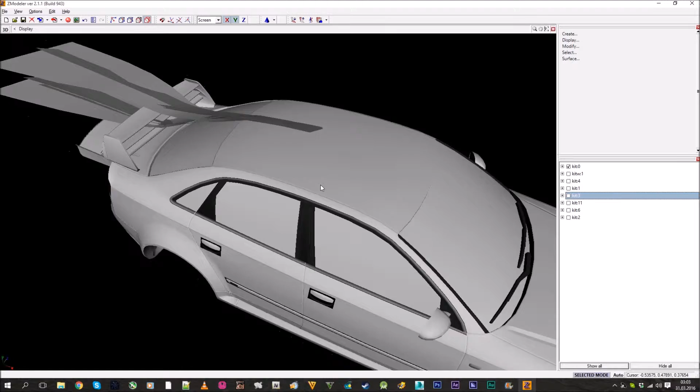So when you import, you have this kind of model. It has this wind effect which is in the game, and here is the tuning kits. If you decide to make a tunable car, just keep them in this file as well - here's all the kits which this car has. I will make it stock so I don't bother with this, I'll just clear it, easily delete them, and it autosaves.

Remember to enable autosave. You can do it in the settings so you don't lose your progress.

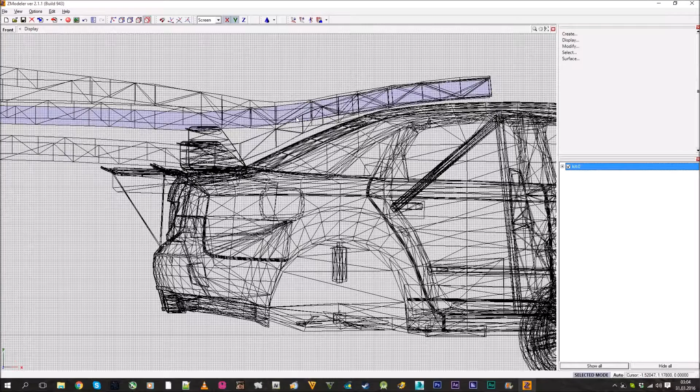Once we have deleted that, we can also delete all these unneeded objects which we don't need, like these wind tunnel effects. Just draw with the mouse, go on them and press delete, and it will go away. Delete all the spoilers, we don't need them, and this one. So right now we have left the bare model, with the cage and driver - we don't need the driver, so just delete it.

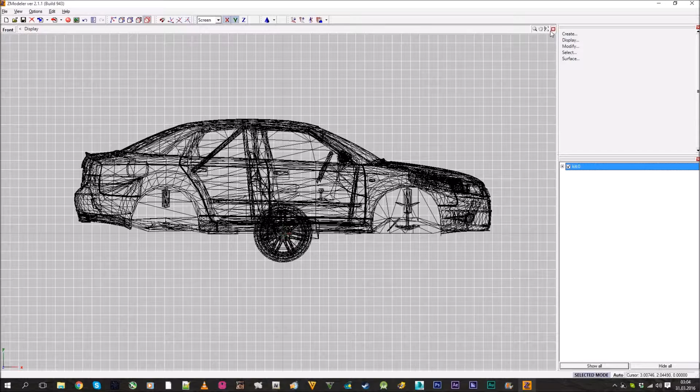So now when we go into 3D view, we have just the car with the seats in the middle and wheel in the middle.

In this there are a lot of objects. If you make for GTA 4 or 5, you can keep these A, B, C and D versions - it's just like a resolution. This is high, I'll show this rear bumper - this is high, this medium, and this low and lowest model bumper.

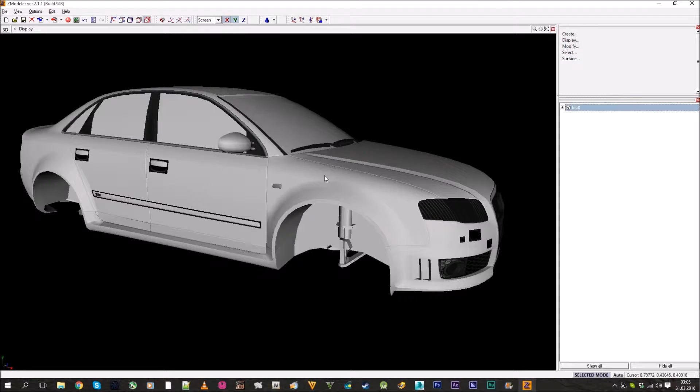So let's go step by step through what I usually do and how I approach making cars for GTA San Andreas. What I usually do first when I import cars from Need for Speed, I go to the Materials Editor.

Find some texture which is already showing, or just press on any, and here's Materials. When you import, you'll import textures as well. Here you'll have a list of all textures used for this model. So before you do anything else, click here and save all textures to your folder where you plan to save the file. I already have them exported, but just click one by one and save them. Because if I closed my Zmodeler and opened it again, they would be gone - I couldn't touch them anymore and would have to import the model again.

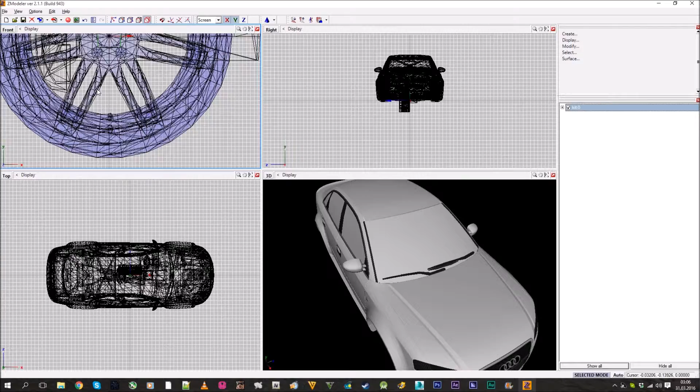So let's continue - as you saw, we have these wheels. We don't need these brake rotors as we will make our own. Here are the brake calipers, we can easily delete. And now in Need for Speed, especially ProStreet, here's the left seat - we can already delete the seats as we won't need them. Seats, engine, seat. What I want to say is, in Need for Speed, the A at the end means the highest level - for example here, rear tire A, it's like the most high-poly model.

So let's start by texturing them, as you already know if you saw my previous episode. Here are all the textures - right now they don't look like anything, and here's usually how I discover which one is which. For example, this one you already know, so you can just name it badge, so later on you know it's a badge. You go one by one looking for textures which already have a texture and which one you recognize.

You can just rename them to names you remember. For example, here I can just rename to Dream and so on. That will do one by one.

How I usually do is click on a random color and just look where it is. So I know this is the door line, so I write in here door lines. Click next, again some random color. Oh, and this is the main body, and we need this especially. And here I just write body. And just continue one by one, and here's misc.

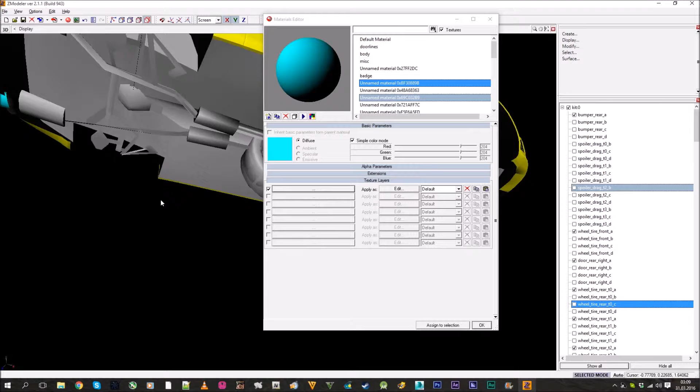I will show later on what I mean. And then badge, and again just look for the random color and see what it's used for. So I know this is for the chrome, so again just write chrome. And this one, again unknown texture, just pick a color.

If you don't see it at all, you can either delete it or leave it. It doesn't matter, but it's better if you delete them so they don't bother you later on. As I don't see this texture, right now it shows everything which you'll see in the game, and there are no hidden objects. You can just fly through them and see there is no orange object, so most likely it's carbon or something, just press delete.

Now this unknown material, you can press orange and just search for the right color. So again, no orange, but just for the sake of doing this faster, I will just quick select all random colors and check which is which.

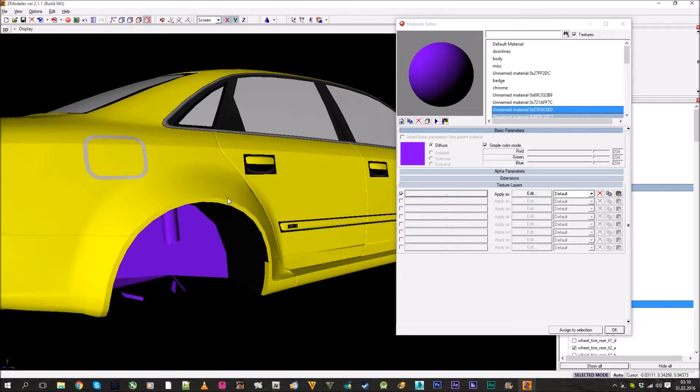And here is this underneath texture which is not in this menu when you import. To get it, you either need to open another common texture file from ProStreet. I already have it exported, so I'll just add it to my list. RS4, and here is the RS4 underbody, and just press OK. And now it's textured.

So I will just write it as under, so I know it's under. Next one, pick any random color. You can just leave it. Next one, and keep them as random as possible.

And one more time, and just keep doing this until you have found out the textures. So I will be back when I have assigned all textures.

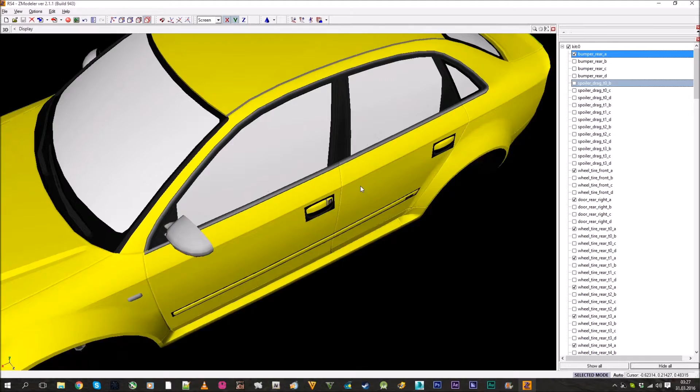Okay, so the first part I will do is get all the, as you can see here, I have many glass textures, well, 6 pieces and there's 6 glass. I don't need all 6 textures, so I'll just assign them all to one texture.

To do that, here's all the objects you will need. So just go to polygon level, click select none. I usually select none, as you know. Then select separated and click on one of the glass pieces. Let's use this glass and assign selection. I select none and back.

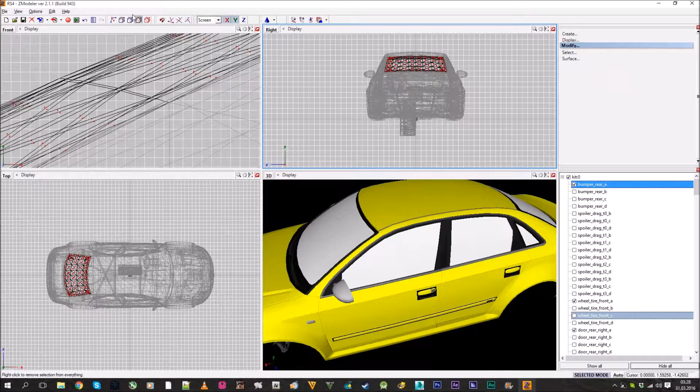And do that to the rest of the glass. Clear, select none, select separated. As you can see, there's a double layer. The second layer is used for the damage inside the Need for Speed game, but I won't need it, so I just assign both layers to the same texture.

So now go to the side view, user view. Let's go to user view because it's easier, and let's disable the main body. Let's find the body.

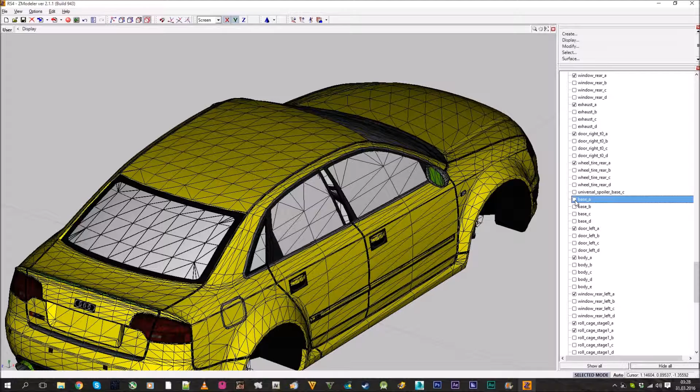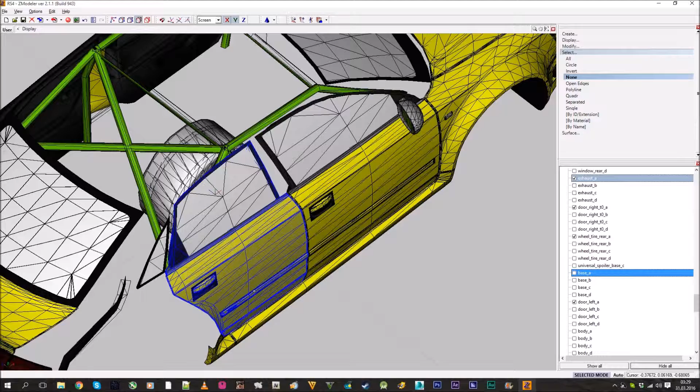Go back to that one glass. We pick the first one and assign selection. None to object, to polygon mode, not to the door, the glass. Select none. Be sure you are in the polygon level, because as you can see here, use this small piece and also here, that's why I go into polygon level to select only glass pieces. Select OK, now select none.

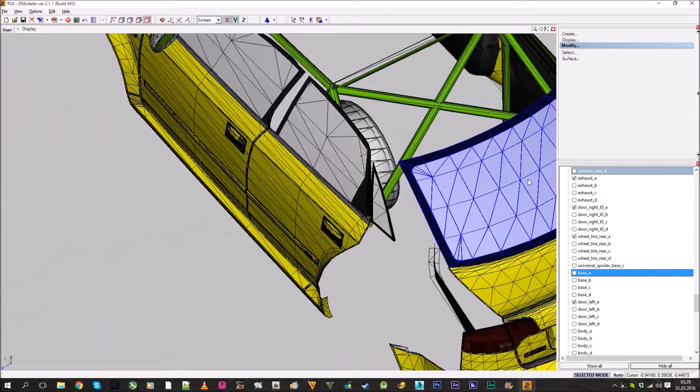Go to the rest of the glass. Let's delete this body roll cage, we don't need this because I won't make it like a race car or anything. I'll just make it a stock RS4, which already is not stock. Did I select that small piece?

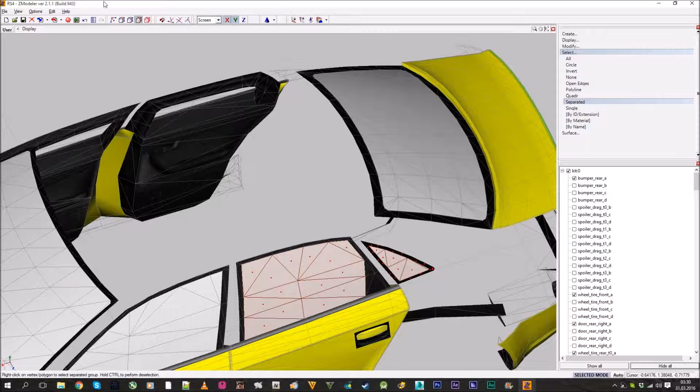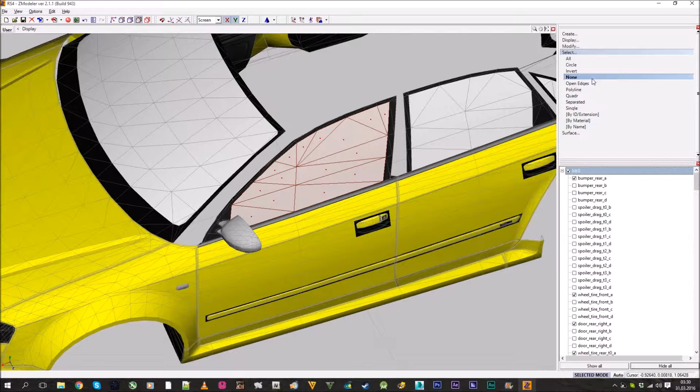I forgot, just find that glass, assign selection, OK, select none. Now go to driver's window, select none, separated, and glass. Be sure you assign them all the same texture, select OK, and none. Now go back to the 3D view and we'll check that glass texture. Glass, is this the right one?

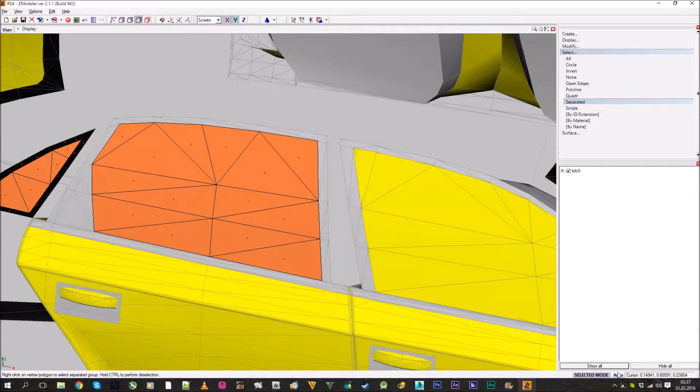Alright, I'm back and just figured out what I had to do. Turns out I needed to delete the first texture layer, so it's applied. Just select separated, enable auto, select mode, and press delete button, and it deletes the first layer. As I said, in Need for Speed they use 2 layers, though I never had this issue before. So we delete the first layer from all glass pieces.

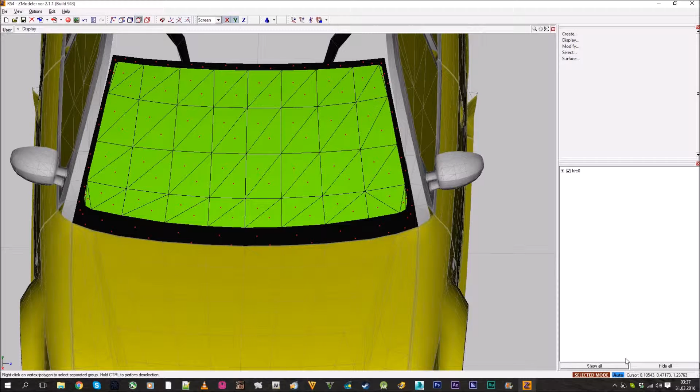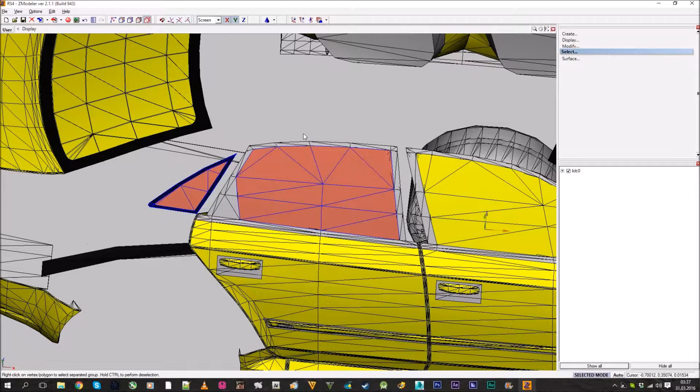And now we can assign. As you can see, I have lost all the textures because I closed the file and didn't save it properly. And now, yeah, now it works as it needs to be. Well, at least now you know if something goes wrong for you.

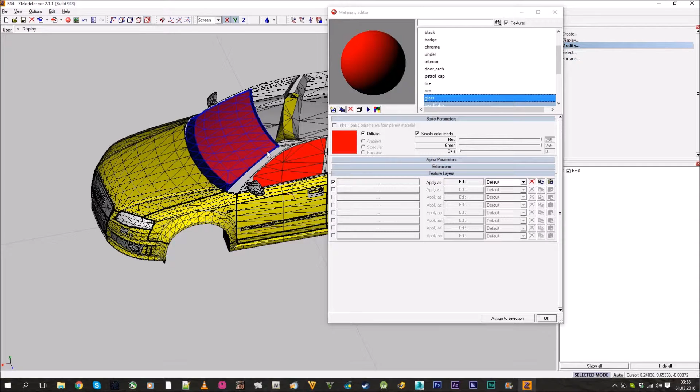And press glass, glass, and assign selection, OK, press none. So now I have all the glasses. This should be all the glasses now. Yeah, no, you can turn back your body that I want. Well, yeah, I can actually turn back the body. That's fine.

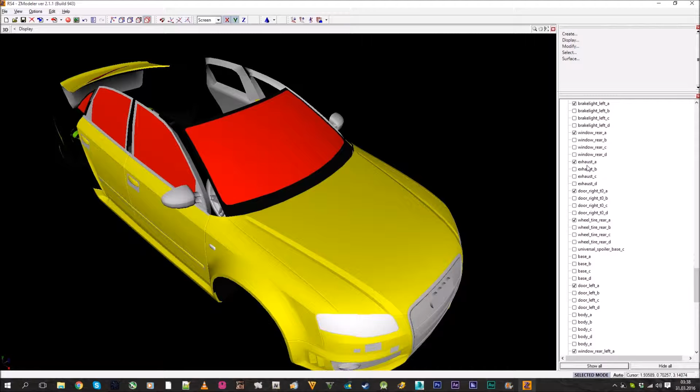Body, where's our body? Where's your body, the body. Base, yeah, turn on the base and body. OK, as you can see all texture is gone, but we don't need them at this stage, as we will modify these materials anyways. So now you can delete all the other glasses as well, and you will have only this one glass.

As we are on this glass, let me show how you can make the working glass in San Andreas. So what you do is go to your glass and pick the color you want. I usually go around 20 or 30 for the blackness of the glass, so something like this. Now go back to extensions and enable Specular Highlight, turn this around 76. This is the optimal shine for the glass, at least for me and how I make them.

Now you need to enable alpha, here enable alpha, and make it the darkness of your tint for your windows. I usually go to 110, because that's most commonly used for vehicles. Without this, sports cars I will make slightly darker so they look better in game. Also I made the specular highlight gray, this only for ZModeler, so it's more closer to the in-game render.

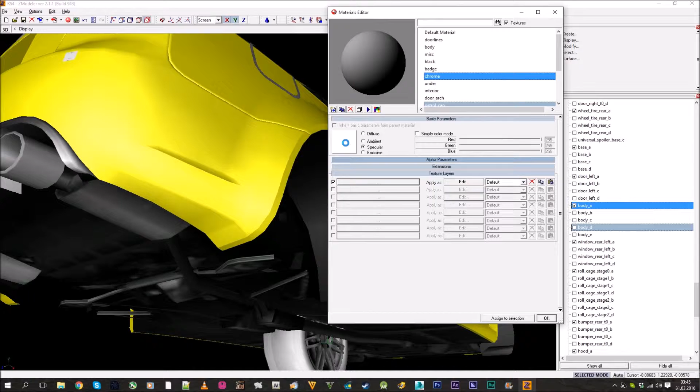I usually use around here, so it's like a gray, but then set specular. Some things you don't need to, I just do this because it's easier for me to work on. So now for the chrome you need to add any high reflection texture. I have this original GTA texture, which again just click here to load and autosphere and enable specular highlight. For this you can make it around 70 to 72, so it's more chromish in the game.

So under, as you can see here is under, many modders don't use specular highlight on the under because it's just too shiny, but if you use the right settings it's bright in game but doesn't look too shiny. So here's the interior. As you can see I set all textures' specular to this gray, but you don't need to do that. I just do it because it's closer to the way it will look in the game.

Here door arch. Door arch is this texture here, and make sure you keep it to the same level as body. Petrol cap I will upload later because I need another texture here. Tire I can add specular already. I just know what level I will need. Rim as well. Rim can be a bit lower because we need it to shine a little bit more. Glass, we already made it.